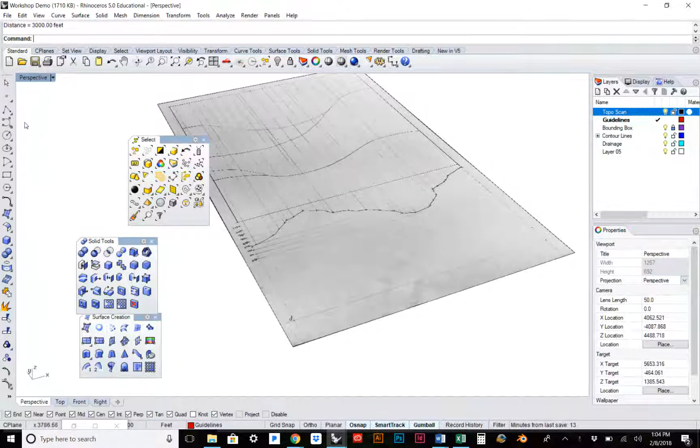So I'll use my polyline here. I'll get as close to that crosshairs as possible and draw a 3,000-foot line. So there's that. That way I can make sure that everything matches to those dimensions.

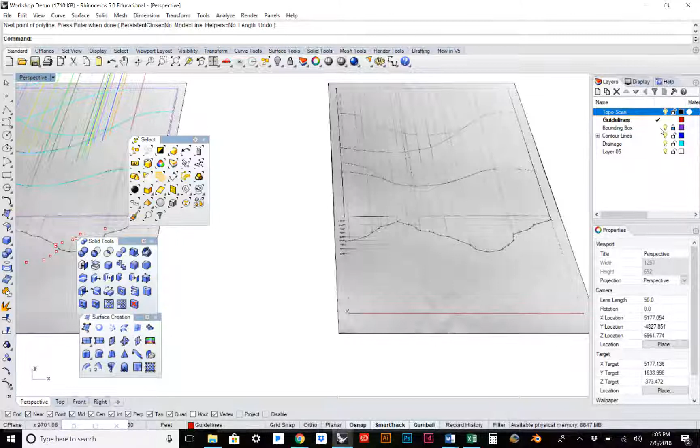The next thing I want to do is also draw my bounding box. I'm going to go to that layer. I should be able to use my smart track to just make sure that that's matching. So I'll click it right around there and do 3,000 by 3,000.

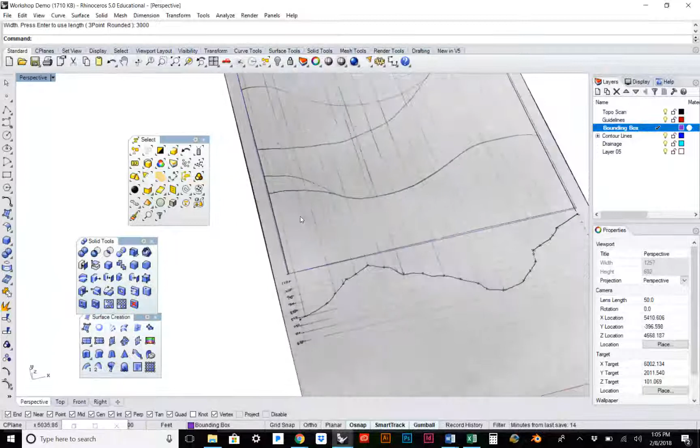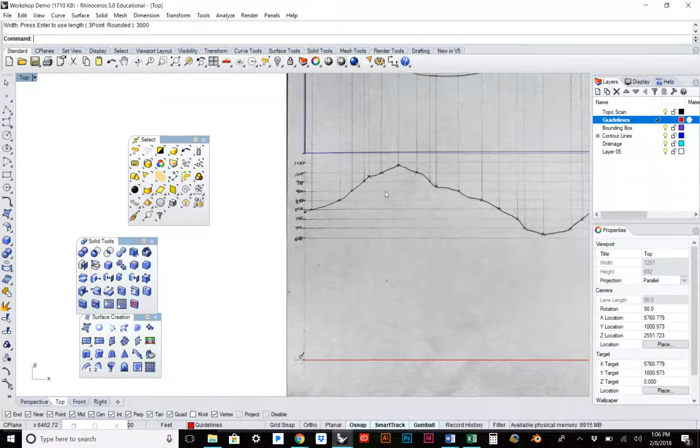The next thing I want to do is, again, start to populate this profile with some points. So I'll go ahead and go to my top view for that and start to place those. Obviously, you can do that through the more manual way, or you could, in this case, draw the profile for what it is. So it sounds like everyone gets the point of putting points.

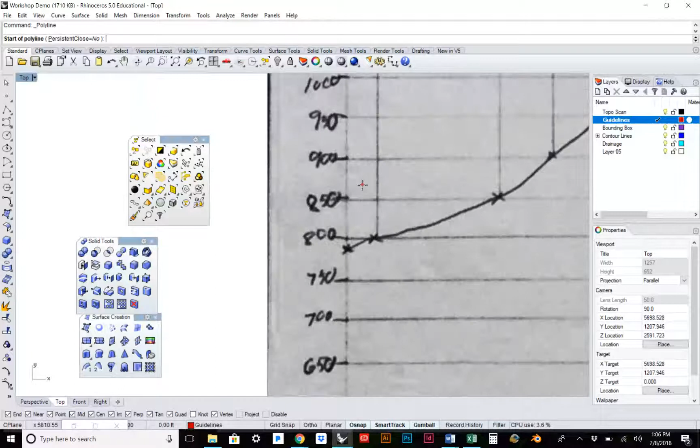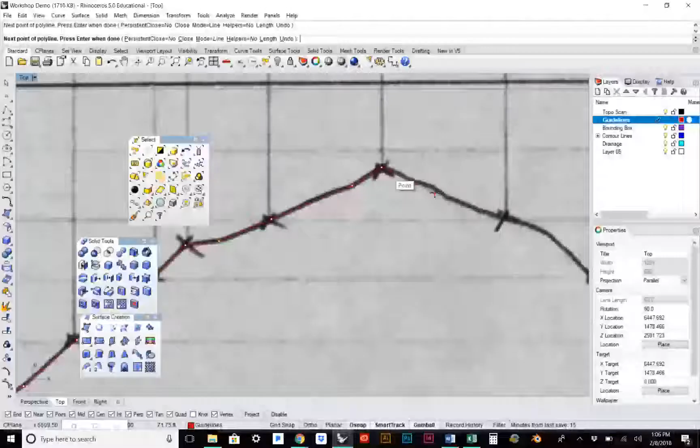So I'm going to actually do it as a solid curve or solid profile for this part of the mountain. So I'm just, again, going to make sure that I start at the correct location, and now I can just give it here. And I can give it obviously a little bit more rigidness to it since I'm doing the entire profile. Luckily, it's not too detailed, so it shouldn't take that long to just kind of plot these points.

So the way we're going to show how you can get quicker results, I can do it at a much higher resolution to get a lot more curves. Obviously, the more curves, the more information, the more that has to be processed. So it's really to your discretion on that.

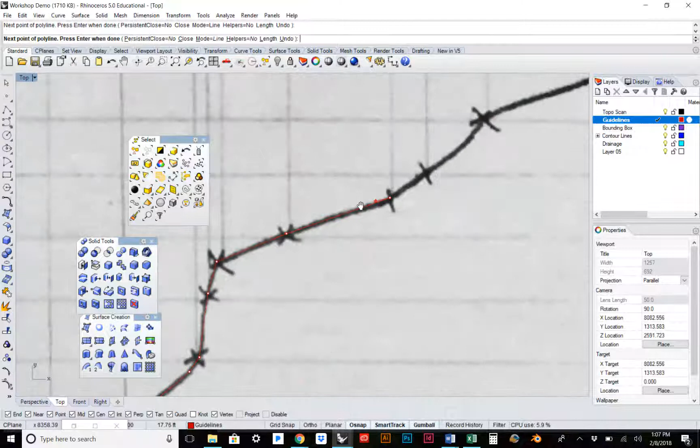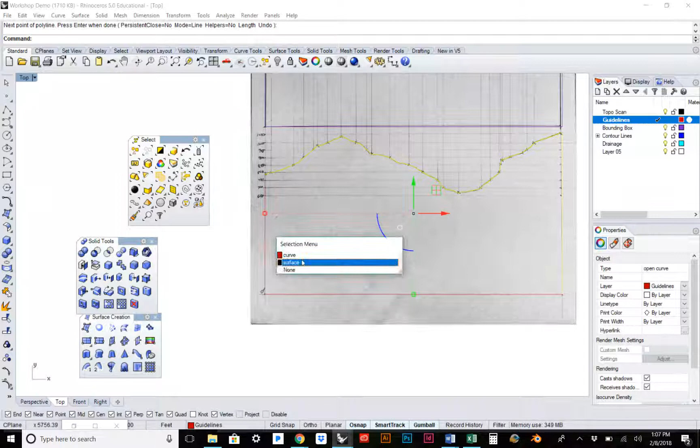So we're almost there. I'll start kind of getting a little bit, and then I'll again make sure I go all the way to that end. So that looks good. And then I can even close it. So I'm going to just bring it all the way down there. Then I'm going to do one to close up this side. So I'll take all these red curves and join them. Go ahead and lock that.

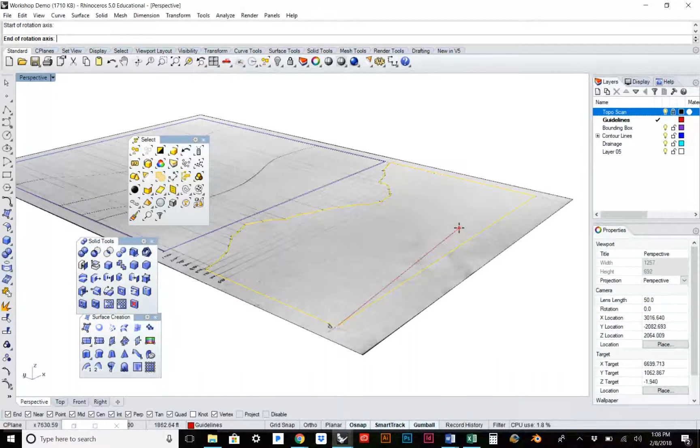So just like before, I want to make sure it's actually rotated the correct way. So I'm going to type rotate 3D, not just the simple rotate. This baseline is my axis, my rotation axis. Now I can just hold shift to lock it in at certain intervals, in this case 90 degrees. So there is my profile standing right side up.

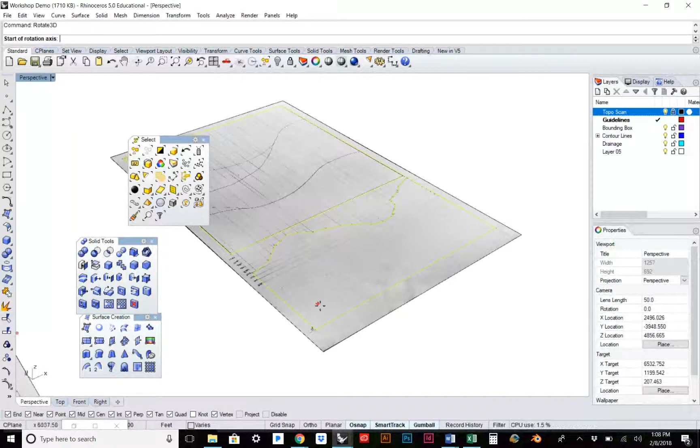I'm actually going to do that with also that bounding box. So let's rotate 3D again. Again, I'm just going to start in this corner, use that as my axis. So there we go.

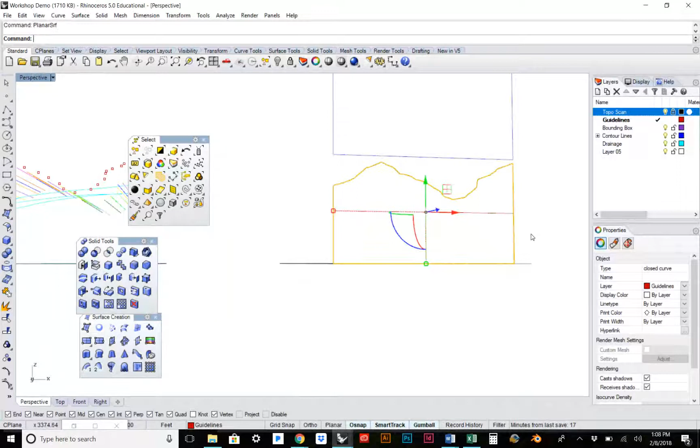Yeah, that's fine. Now I can select my curve, this profile, and now I'm going to type planar surface. And so I'll change it back to being shaded so you can actually see that it is, in fact, a solid surface that we have in here.

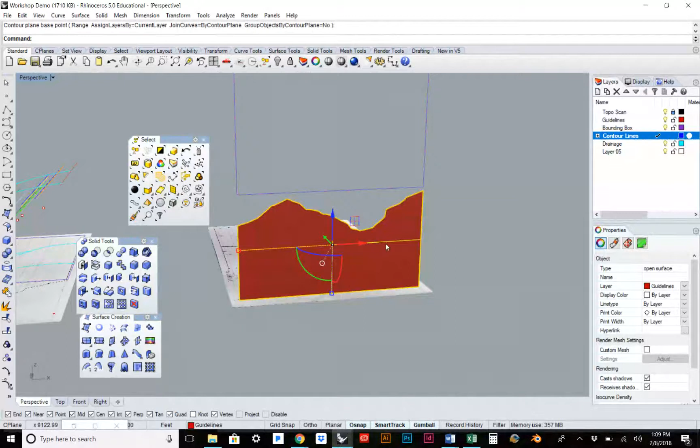And from this solid surface, we can actually contour it, and that's going to give us all our main intersection points with the profile. So like I said, you can start to get a higher resolution depending on the contour intervals. Go to the correct layer first. I'm going to type contour. Base point, that's just at the bottom here. The direction, make sure it's going up.

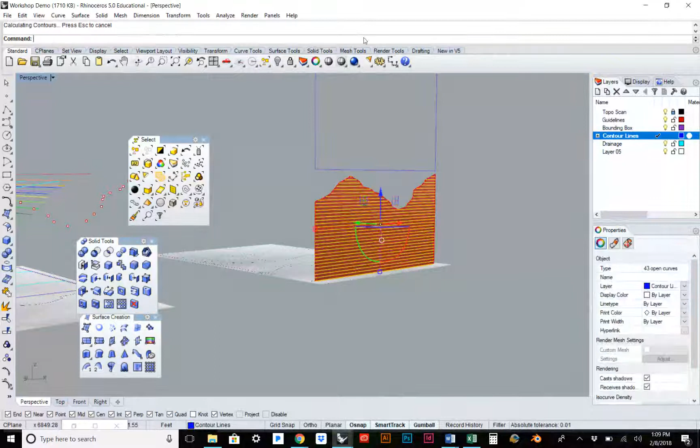And then I'm going to say my distance between contours. In this case, I'll keep it somewhat simple at 50-foot contours. So it does it nice and quick. And now you've got all your points here.

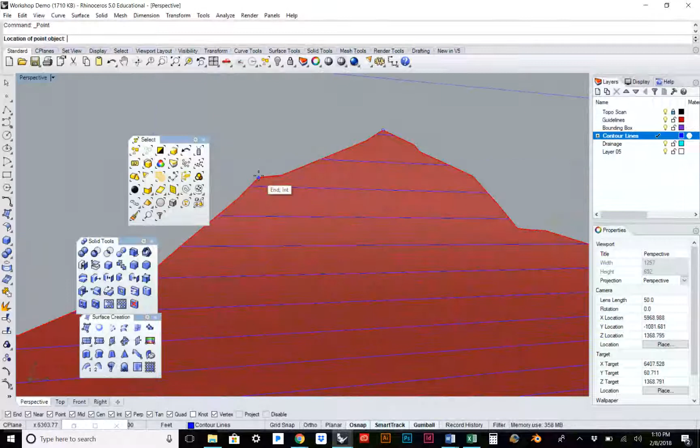And like I said, you still probably want to include some specific points for these contour lines. So I'm also going to draw some points at those critical junctures where I want to make sure I still retain that detail of the landscape. I don't have to do a whole lot.

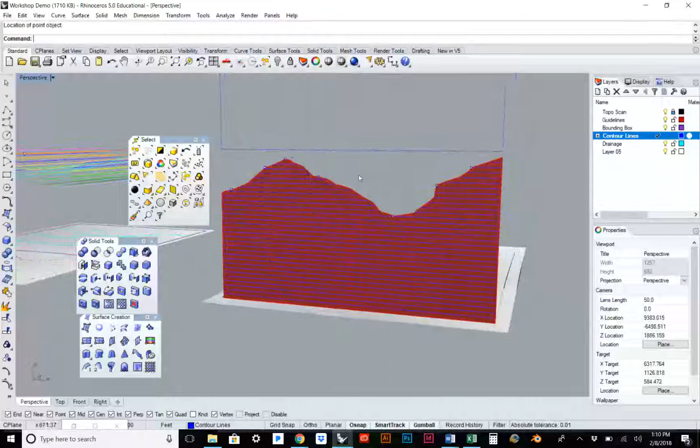Looks like that just missed it. But things like this where you have these kind of sudden changes in topography are going to be critical. So that should be good for now. I can just add one more there.

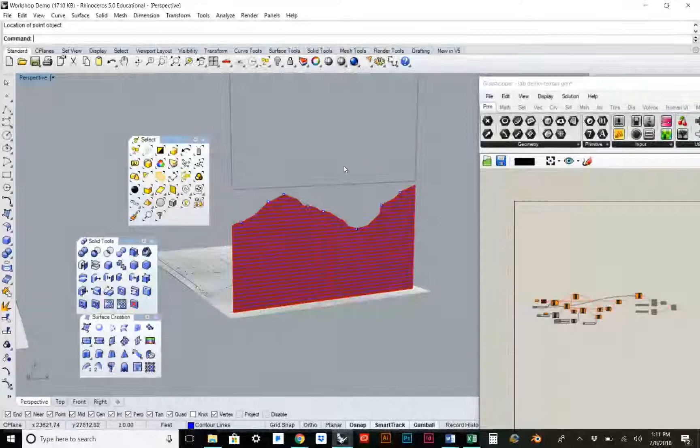Okay. So what I want to do now is migrate over to Grasshopper. So we'll get to the part where we're creating the surface, but for now, we'll go through these steps. And I know I breezed through it on Tuesday just to quickly show you an example, but the way this works is that you have this first panel here. This is how you bring in any type of geometry from Rhino into Grasshopper. So this is how you reference that geometry into Grasshopper, and from there you get to start to manipulate it.

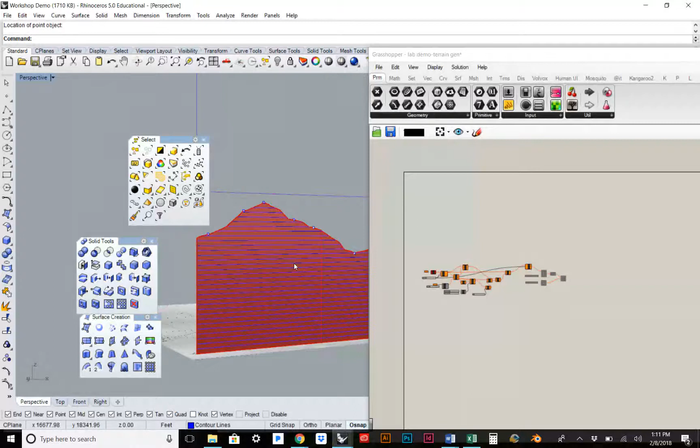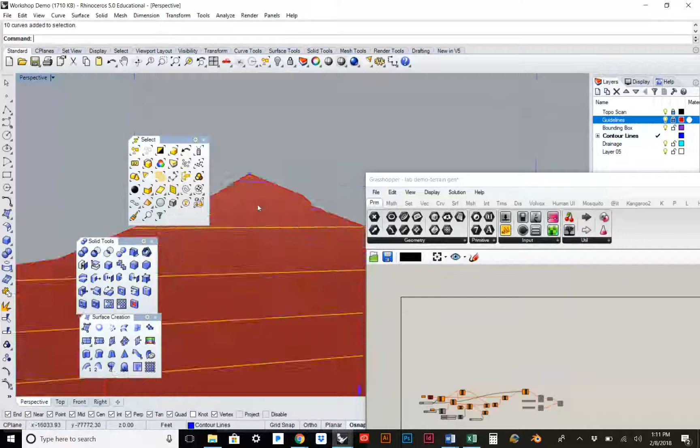I'm going to be referencing both these contour lines I created as well as these points. Because they're different geometry, they're going to need different reference components. I'm also going to delete some of these excess curves that I don't need. Let me lock this so I can just get rid of all those contours that were too low. So I'm going to go ahead and reference that. That's pretty much going to get captured. I mean, let's just do it for the sake of consistency.

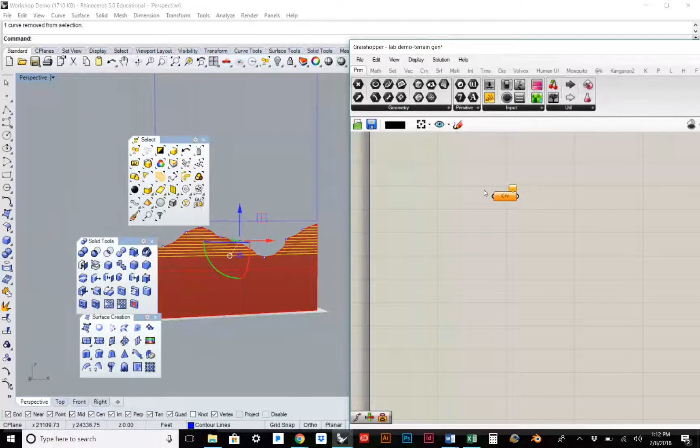So here's my contour curves. So in here, I'm going to go to my geometry. Like I said, this is where you reference any type of Rhino geometry. I'm going to select curve, bring it in here. If it's not processing anything, it's usually orange. So I'm going to right click it, go down to say set multiple curves. That's going to think, and now it's gray. When it's highlighted, it's green, and there you can see it's also highlighted in Rhino workspace.

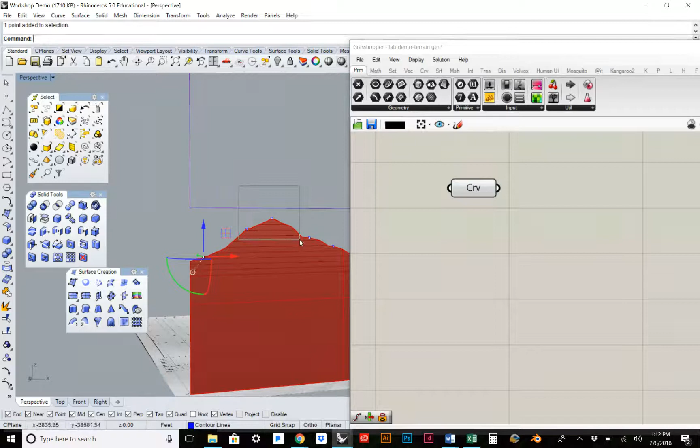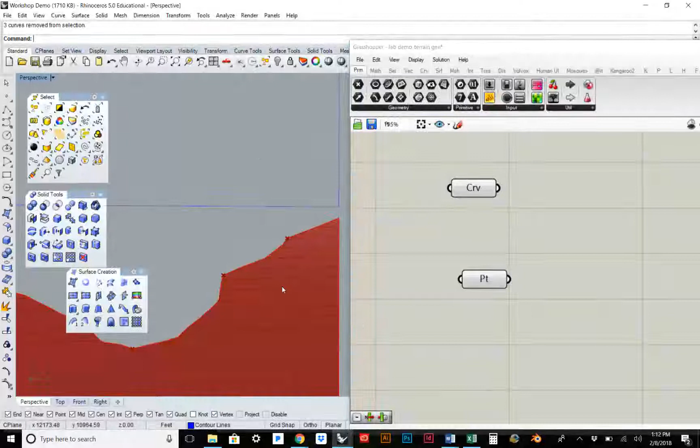So like I said, I want these curves as well as these specific points. So let's go ahead and select them as well. Oops, I selected that too. So now instead of curves, I'm going to go back to geometry and say points, set multiple points. So they're being displayed as this X.

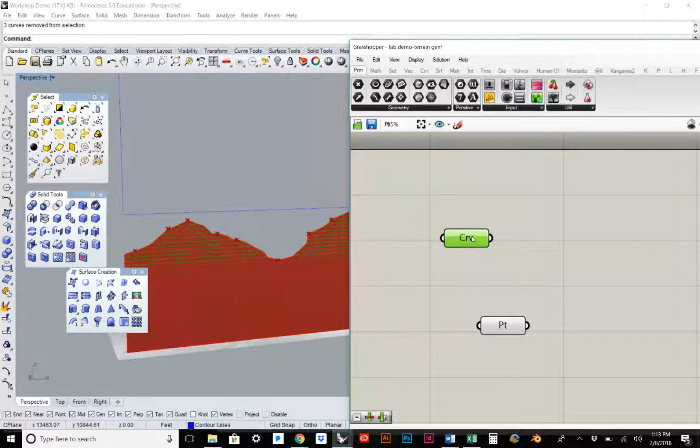So the last thing I need to do, because again, I'm going to be extracting from these points, just like how we did manually, lines. So these curves, I need to find their endpoints to generate those curves as well. So I need to take this one more step further. Whenever you start to analyze or extract data from certain geometry, you would most likely find that information in these other tabs. The first two are whenever you're doing any type of equation or calculations. Sets is how you start to organize data. So these aren't dealing with geometry specifically, but just the data that's contained.

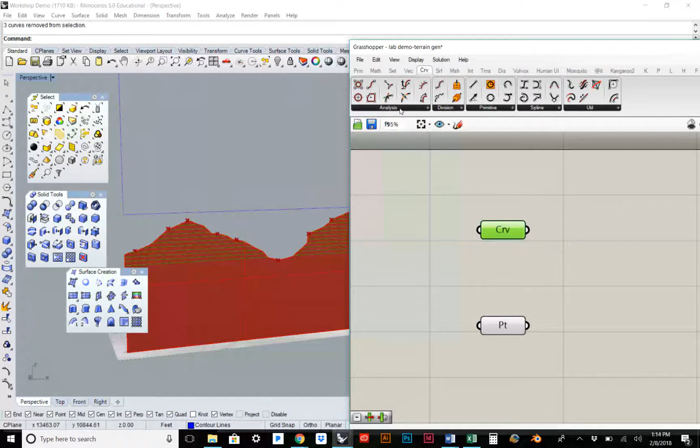But then you start to get into the other things. So instead of points, it's called vectors, or points and directions. There's your curve tab, there's your surface. So like I said, when you start to analyze and create different geometry in Grasshopper, go to that respective tab. So in this case, I'm trying to get points from this curve. So I'm going to go to the curve tab, go to analysis and choose the endpoints. So this is going to give me points at either end, both the start, that's what this S says, and the end.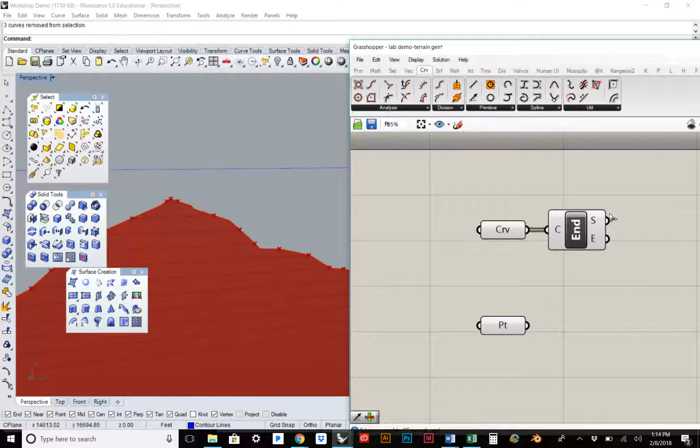Again, if you're not familiar with Grasshopper, and you're wondering what all these different letters are at both the input of these components as well as the output, just hover over it and it'll tell you what it's looking for. So you can see it's looking for a curve. That's why that's plugged in there. And these say start and end, and the icon is that of the point component. Okay, so now we have all those points that we've plotted out manually, so we can do the same thing shown in that scan.

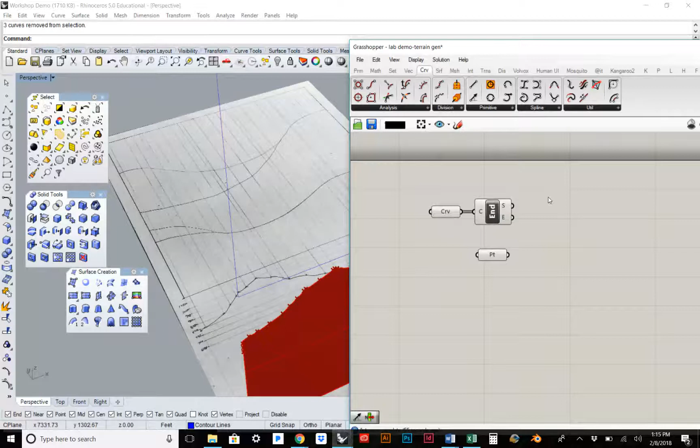So from these points, I'm going to do a line SDL. This component essentially finds some type of point that you're referencing, and it's going to create a line from that point in any direction you want. So if I stay in this curve tab, I'll go to primitive and choose line SDL. So that's what it means.

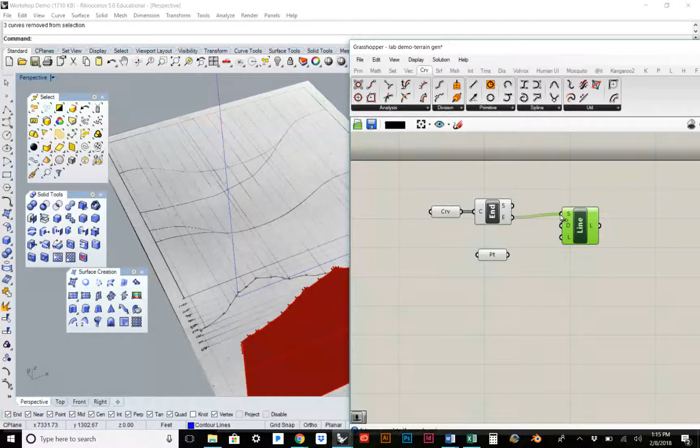So start point, direction, and length. So the start point, it's both the start and the end point. If I just click, hold, and drag this over, it's going to replace that. So in order to drag multiple lines into these inputs, you have to hold shift. You'll see even the icon changes to like this green with the plus sign. So now they're all going to start from all those points.

The direction, I do want them to go in the vertical direction. And when I look at this, I see it goes 0.0, 0.0, 1.0. So the way the vector works is that it really just works off of any number between 0 and 1 being kind of that absolute direction. So it's organized just like any coordinates. You have X, Y, and Z.

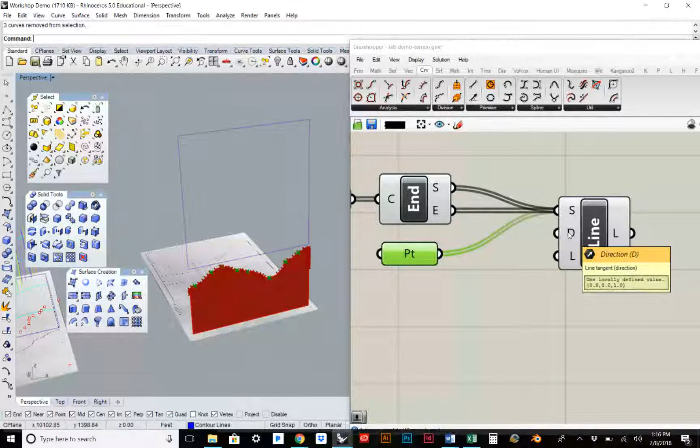So if Z has a 1 on, that means it's going up. If the first number has a 1 on it, it's going in the X direction. And then if it's in the second one, it's going in the Y direction. And then you can obviously have multiple, and that's where you start to get angles. But those are kind of those orthogonal vector directions.

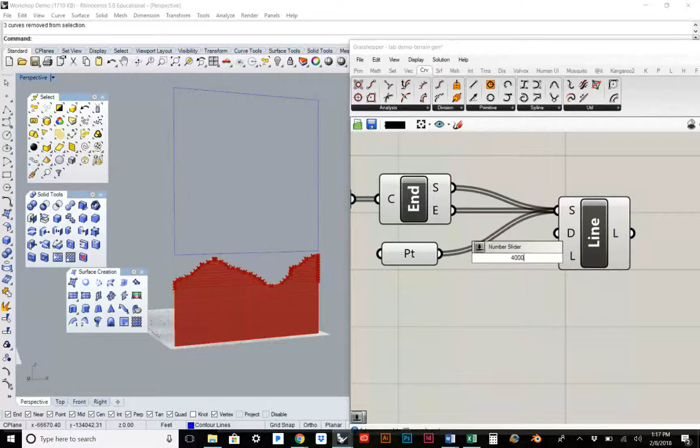So the next thing I want to do is actually give them length. I think it gives it a default of 1, which you can see is just very microscopic. It's just barely there. I know that this purple bounding box is at least 3,000 feet. So I'm going to just give it an outrageous dimension and say 4,000. So I can just double click this screen and start typing anything I want to prompt. So now I've got a 4,000 slider. So now you can see that they're all going up 4,000 feet.

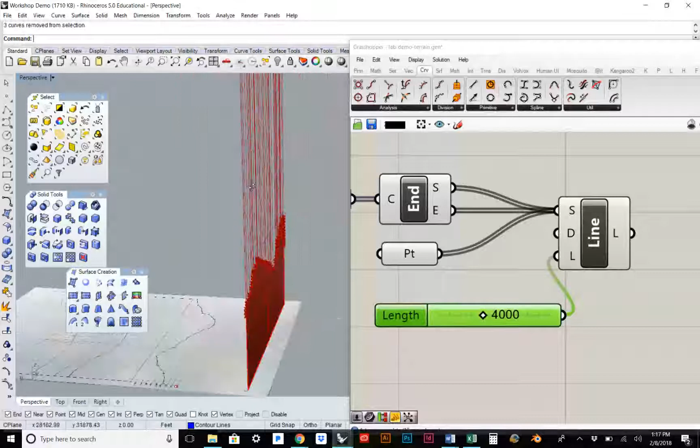What's good is that they're going to be overlapping with the box. However, you could see that I'm still going to have to actually rotate them and then lift them up all to their respective heights. If I follow that same principle of just assigning a length, I can see that all the points are at their correct height, right? See, I see them all there.

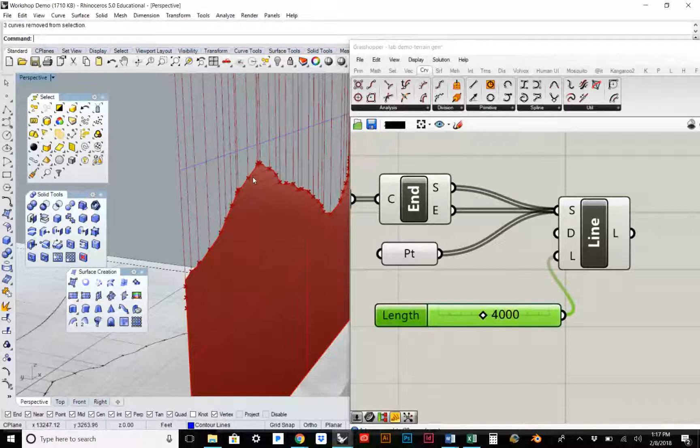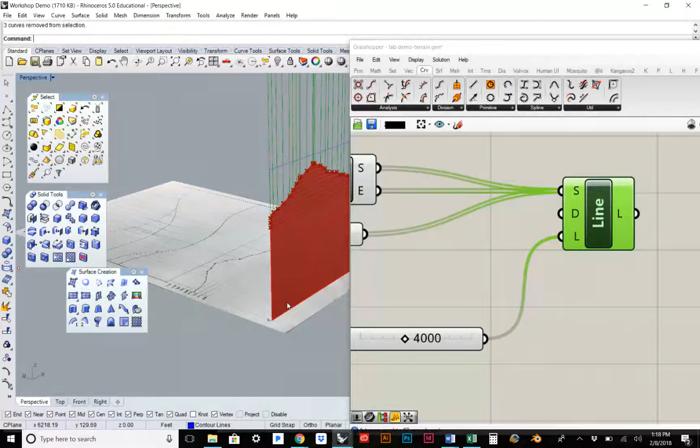So what if I just decide to change the direction of these lines so they're going to take each of those points and shoot out? Let's give that a shot. So instead of going in the Z direction, I'm going to go in the Y direction. So if you're ever struggling to know what direction, you should have this world axis down here. So Z up, X is going to the right, and then Y is going to the top. So that's like plan view, X, Y axis.

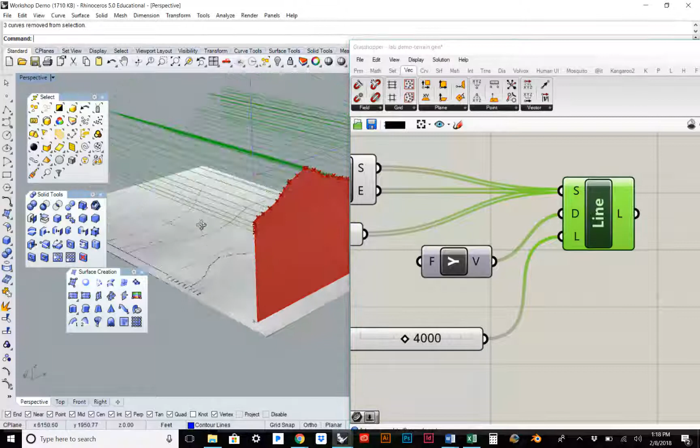So now I want to actually give it a Y. So I go back to my vector, then I choose vector and choose unit Y. Now I'm going to drag it in there. And wow, look, now you've got all your lines in their correct height. Yay. In this case, I'm actually going to reduce their length to 3,000. So I'm just going to double click on this, hit 3,000 so that they are the correct length.

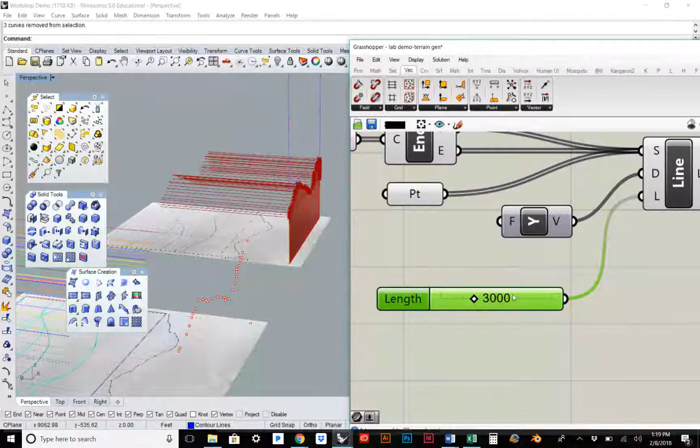And from here, I can start to generate my surface. I'm going to go a couple more steps starting in the next video, but this is pretty much as simple as it can get. So you can see how much more automated this version becomes versus having to trace, then move them all to their respective height, right? So this is a much more efficient way of starting to generate the surface.

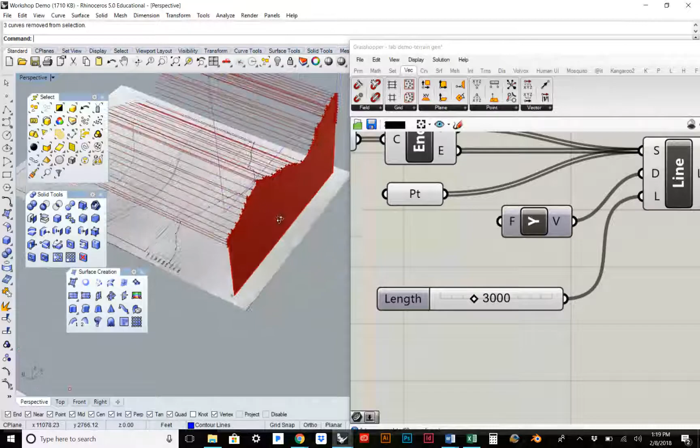There's a couple other ways I'll show you guys in terms of why we're doing it this way, which just yield different results, which isn't what I want. So I'm going to go ahead and just stop that there for that recording.